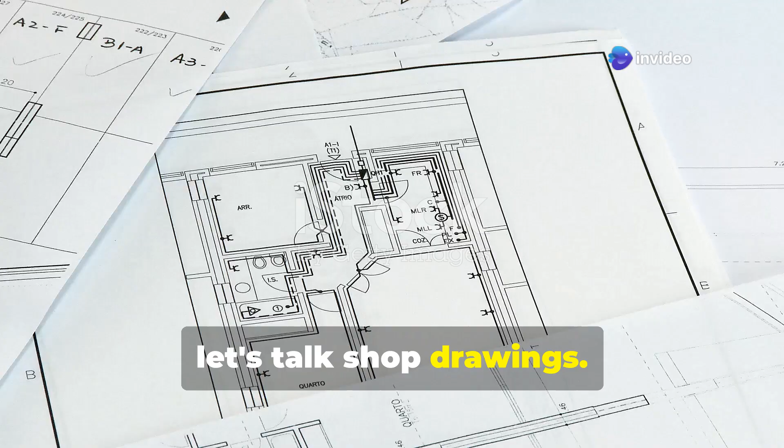All right, let's talk shop drawings. Shop drawings are detailed plans that show how various components of a building will be fabricated, assembled, and installed. Created by contractors or suppliers, these drawings are submitted for approval before construction begins. Let's break down the key points about shop drawings in construction.

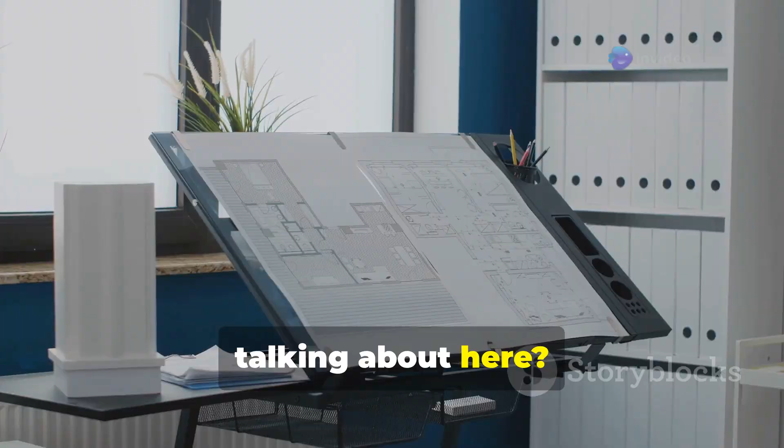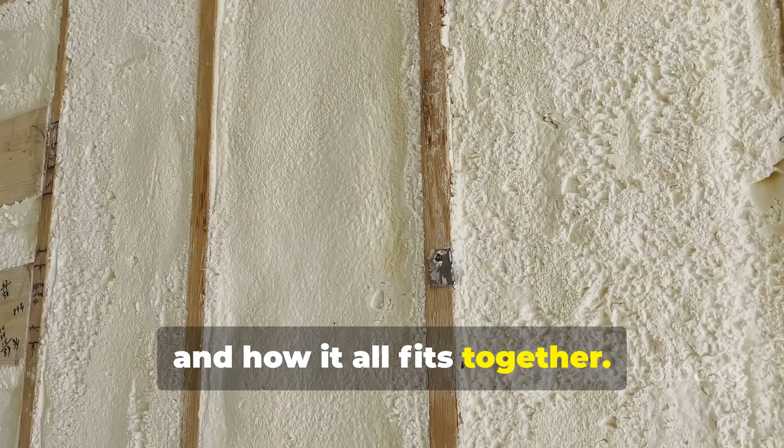So what kind of detailed information are we talking about here? Think of shop drawings as the instruction manuals for every single piece of your building. They tell you exactly what materials to use, how big each piece should be, and how it all fits together. We're talking about the exact dimensions of your windows and doors, the type of insulation, the layout of your electrical

wiring, and more. These drawings include dimensions, materials, manufacturing methods, and installation details. They ensure everyone is on the same page, from the architect to the contractor. It's all about getting the details right, because in construction, the devil is always in the details.

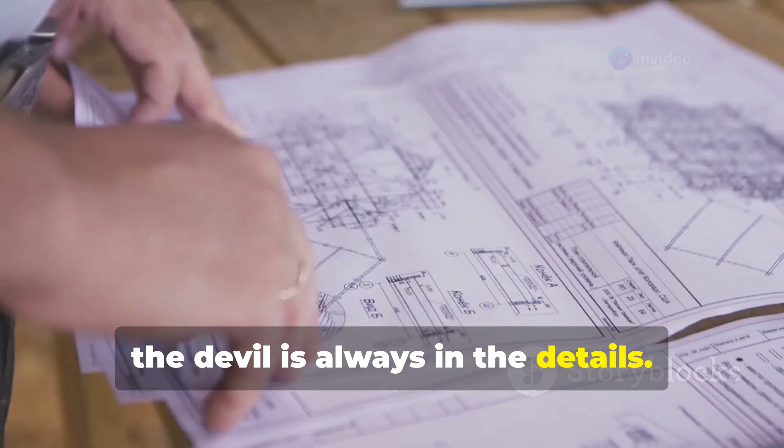Now let's talk about how these shop drawings play into the actual construction process. These drawings are the backbone of the entire operation, serving as a bridge between the design phase and the actual construction on site. Many components are custom-made, fabricated to specific measurements and specifications. This means that each piece is unique and tailored to fit perfectly within the overall structure.

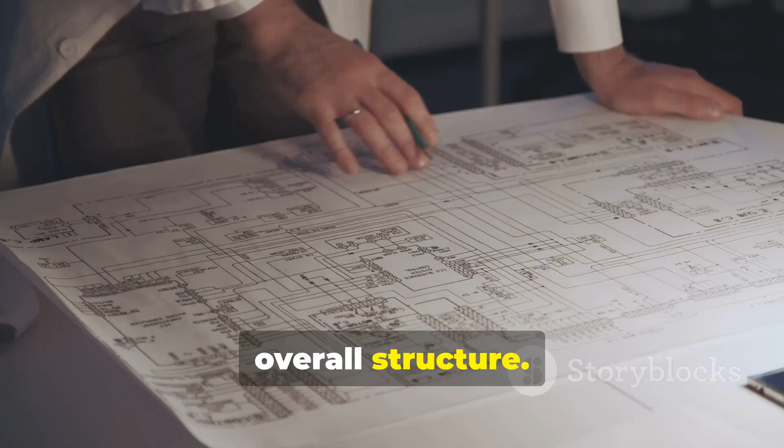Shop drawings guide the fabrication of these components, providing manufacturers with all the necessary information. These detailed drawings ensure that every element is crafted with precision, adhering to the highest standards of quality. This includes materials, dimensions, tolerances, and any special finishes. The level of detail in these drawings is crucial, as it leaves no room for error during the fabrication process.

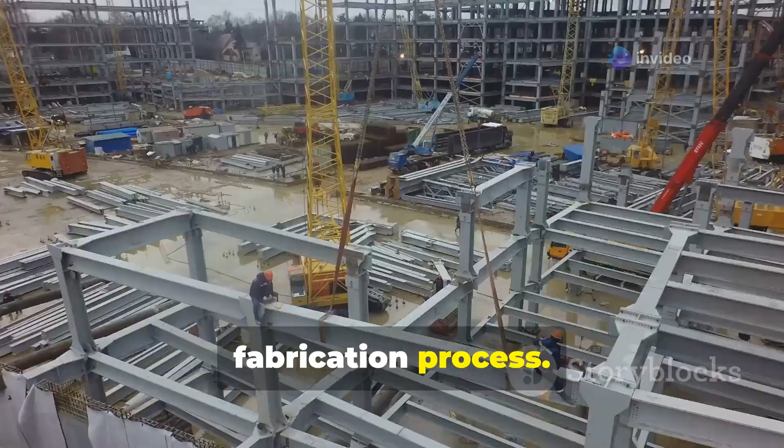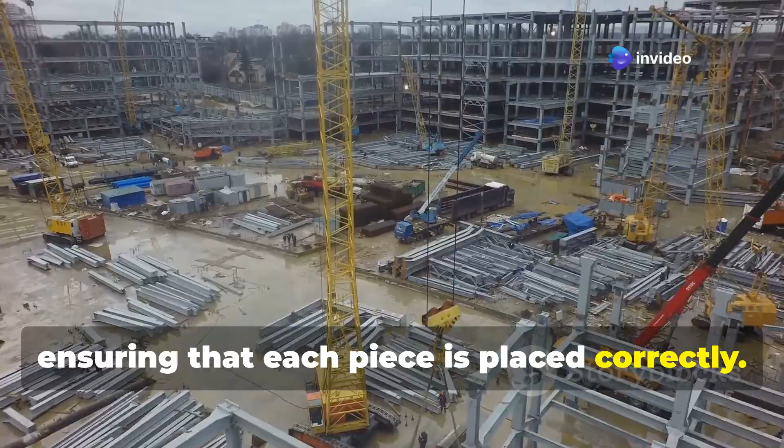But it's not just about fabrication. Shop drawings also show how these components are to be installed on site. They provide a clear roadmap for the installation team, ensuring that each piece is placed correctly. They include detailed diagrams and instructions on how the pieces fit together. This step-by-step guidance is essential for maintaining the integrity of the structure and ensuring that everything aligns perfectly.

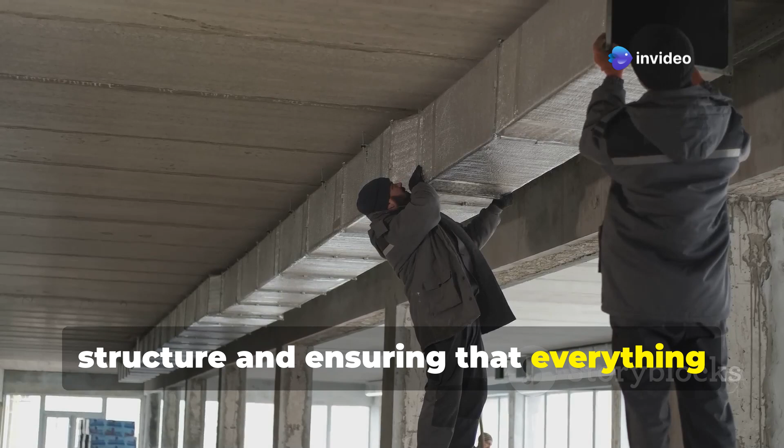This ensures everything goes together smoothly on site, preventing costly mistakes and reducing waste. A well-coordinated installation process can save both time and money, making the project more efficient. Remember, time is money on a construction site. Delays can be expensive, so having accurate shop drawings helps keep the project on track.

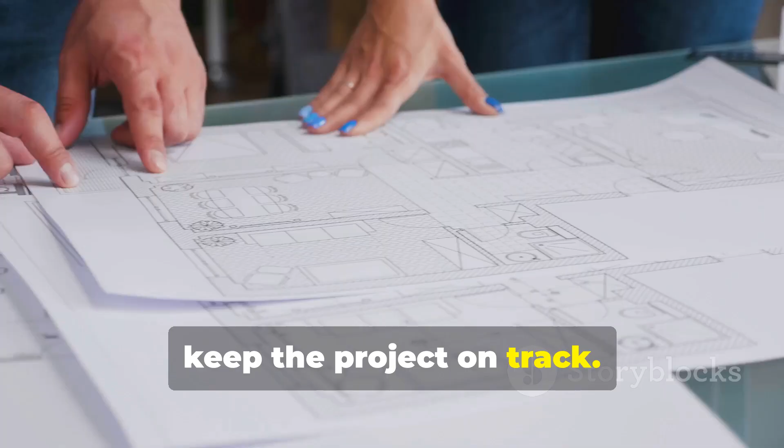Accurate and detailed shop drawings are essential for a successful project. They serve as a reference point for everyone involved, from the fabricators to the installers. They help keep the project on schedule and within budget. By providing a clear and detailed plan, shop drawings ensure that every phase of the construction process runs smoothly, ultimately leading to a successful and timely completion.

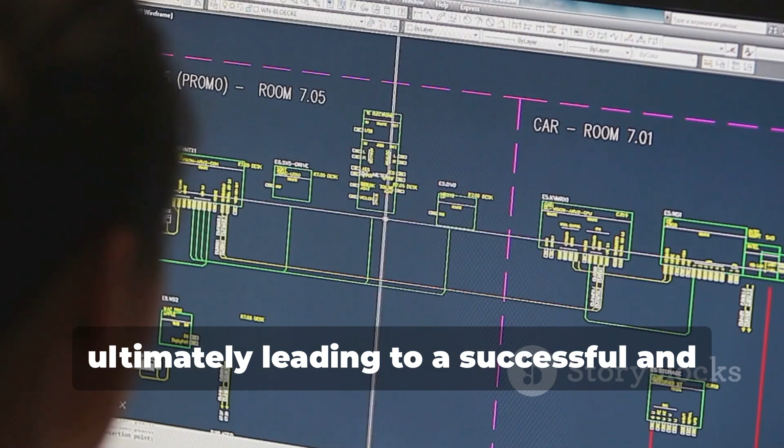Construction is a team sport, and communication and coordination are key. Shop drawings act as the communication hub for the entire project. They help avoid potential clashes and conflicts between different building systems. By overlaying different shop drawings, the design team can identify areas of interference.

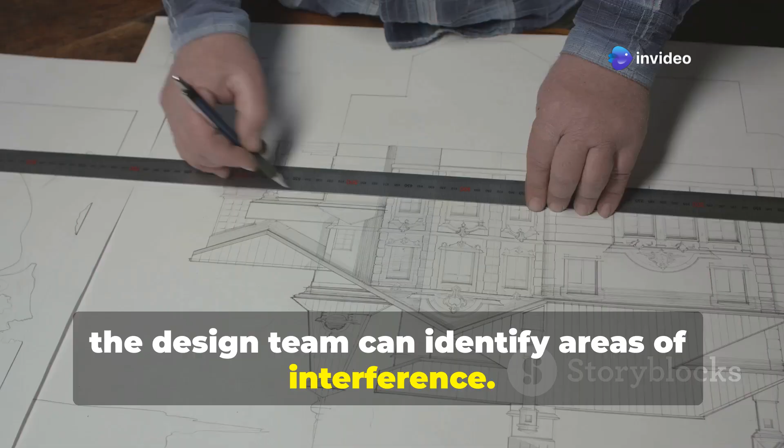This is especially important in complex building designs with tight spaces. Shop drawings allow the team to virtually assemble the building, identifying and resolving issues early on. This proactive problem-solving saves time, reduces costs, and ensures the project runs smoothly.

Now, let's talk about the approval process for shop drawings. This is a critical step in any construction project, ensuring that every detail is meticulously planned and executed. The contractor or subcontractor submits their shop drawings for review. These drawings are detailed plans that illustrate how various components of the project will be constructed.

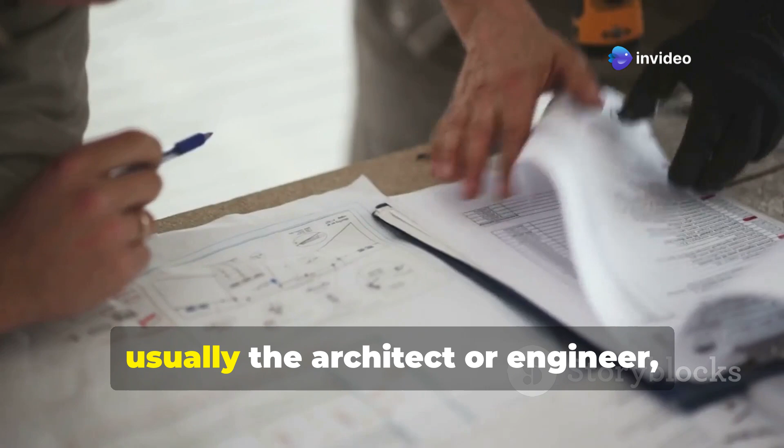The consultant, usually the architect or engineer, reviews these drawings to ensure accuracy and compliance with project requirements. This review process is essential to catch any discrepancies or errors early on. They check dimensions, materials, connections, and construction methods. Every aspect is scrutinized to ensure it aligns with the overall design and specifications of the project.

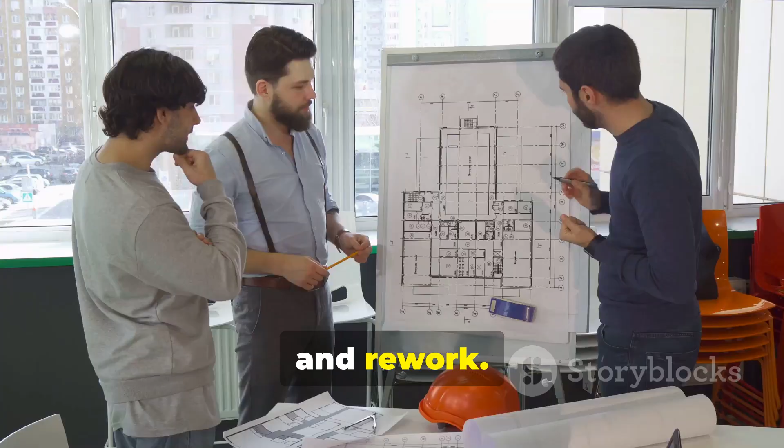This approval process protects everyone involved, ensuring the owner gets what they paid for and the contractor builds to the correct specifications. It also helps in avoiding costly mistakes and rework. It also ensures the architect's and engineer's design vision is realized. Their creative and technical input is vital for the project's success, and the approval process helps in maintaining the integrity

of their designs. Don't take the approval process lightly. It's a collaborative effort that requires attention to detail and clear communication among all parties involved. Make sure the shop drawings are reviewed thoroughly and signed off on before any work begins. This step is crucial to ensure that everyone is on the same page and that the project can proceed smoothly.

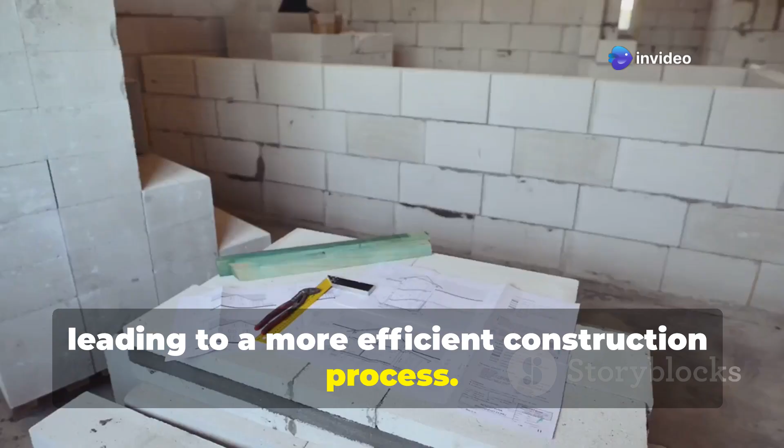This small step can save a lot of headaches down the road. Properly approved shop drawings can prevent misunderstandings and disputes, leading to a more efficient construction process. Accurate and approved shop drawings are crucial for a successful project. They serve as a roadmap guiding the construction team and ensuring that the final outcome meets the project's goals and standards.

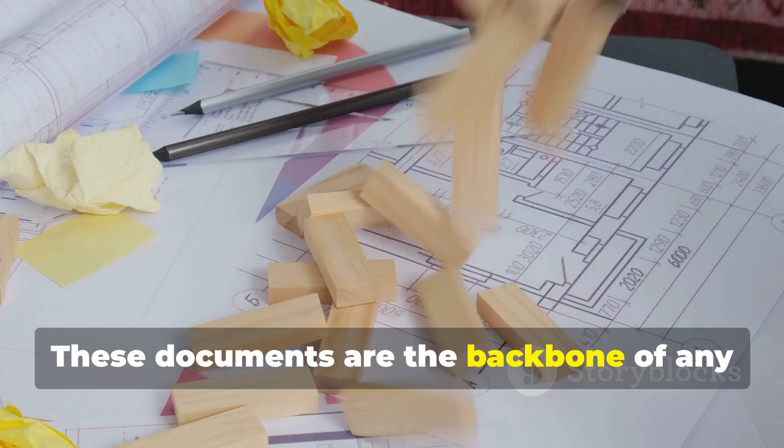Let's talk about the importance of accuracy and compliance in shop drawings. These documents are the backbone of any construction project, serving as the detailed instructions for how a building or structure should be constructed. Without precise and compliant shop drawings, the entire project can face significant risks and setbacks.

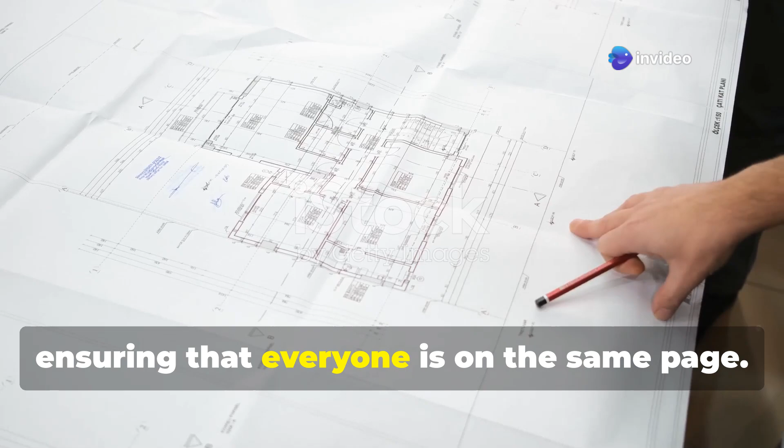These drawings are legally binding documents that dictate how your project will be built. They serve as a contract between the owner, the architect, and the contractor, ensuring that everyone is on the same page. Any discrepancies or errors in these drawings can lead to costly delays, legal disputes, and even safety hazards.

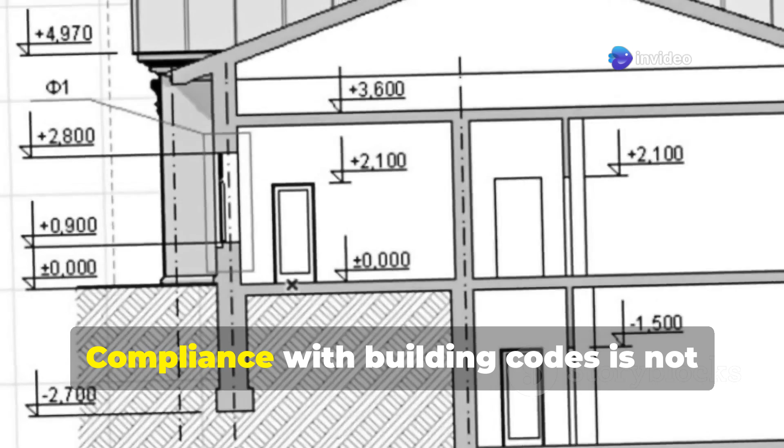They must be accurate, detailed, and comply with all applicable building codes and industry standards. This means that every line, every measurement, and every note must be meticulously checked and double-checked. Compliance with building codes is not just a legal requirement, it's a matter of safety and quality.

Safety and structural integrity start with accurate and compliant shop drawings. These drawings ensure that the building will stand the test of time and withstand various stresses and loads. They are the foundation upon which the safety of the entire structure rests.

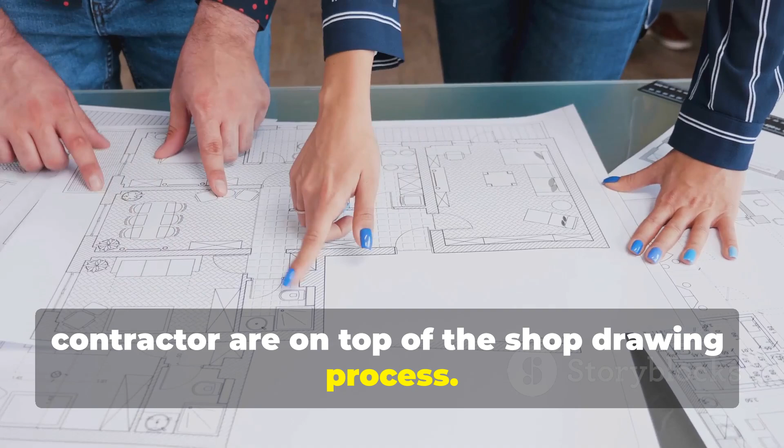Owners need to ensure their architect and contractor are on top of the shop drawing process. Regular reviews and updates are essential to catch any potential issues early on. This proactive approach can save time, money, and resources in the long run.

Contractors need to ensure their subcontractors submit accurate and compliant drawings. This means setting clear expectations and providing the necessary resources and support. A collaborative effort between all parties involved is crucial for the success of the project.

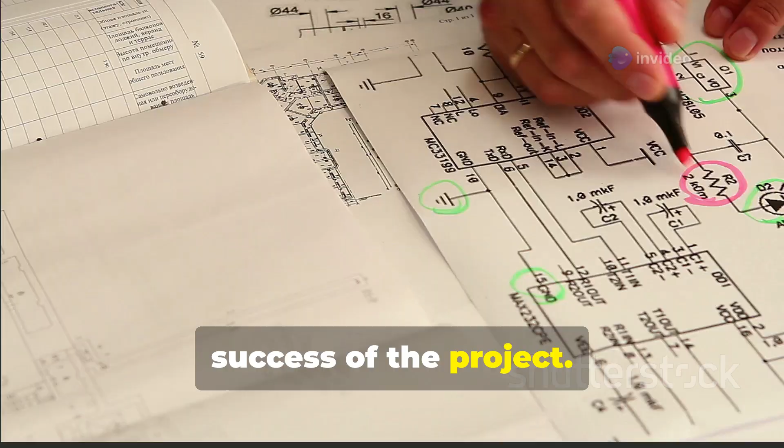Subcontractors need to understand the importance of getting the details right. Every small detail can have a significant impact on the overall project. Attention to detail and a commitment to accuracy are essential qualities for anyone involved in the creation of shop drawings.

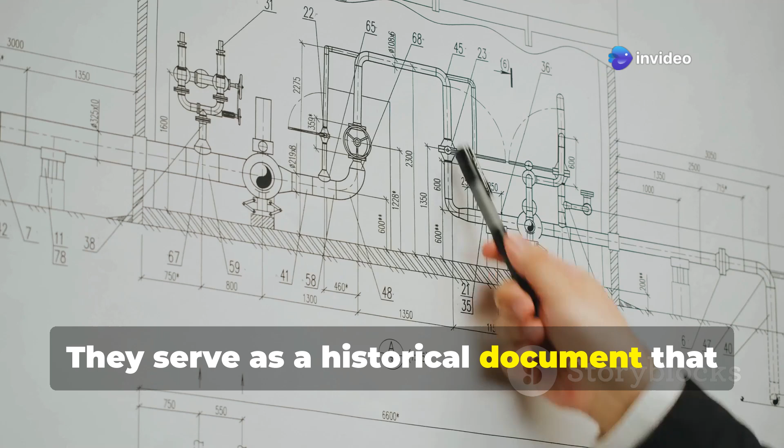Shop drawings are a record of what was agreed upon and what should be built. They serve as a historical document that can be referred to long after the project is completed. Keeping these records organized and accessible is important for future maintenance and renovations.

If something goes wrong, these drawings are the first thing people will look at. They provide a clear and detailed account of what was planned and what was executed. In the event of a dispute or investigation, accurate shop drawings can be a crucial piece of evidence.

Let's make sure they're something we can all be proud of. By prioritizing accuracy and compliance in shop drawings, we can ensure the success and safety of our construction projects. It's a collective effort that requires diligence, collaboration, and a commitment to excellence.

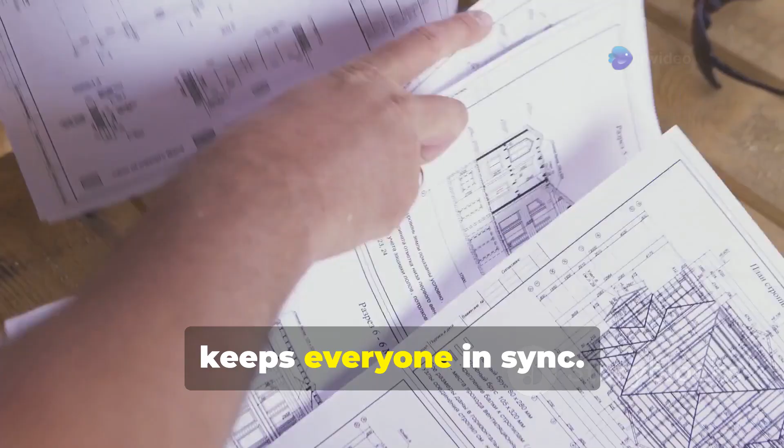Construction is a symphony of moving parts with different trades working together towards a common goal. Shop drawings act as the sheet music that keeps everyone in sync. Different subcontractors need to coordinate their work to ensure their systems integrate seamlessly. Shop drawings provide a common language and shared understanding of how all these pieces fit together.

By overlaying these drawings, potential clashes can be identified and adjusted. This collaborative approach helps prevent costly rework and schedule delays. Shop drawings are one of the most effective communication tools in the construction industry.

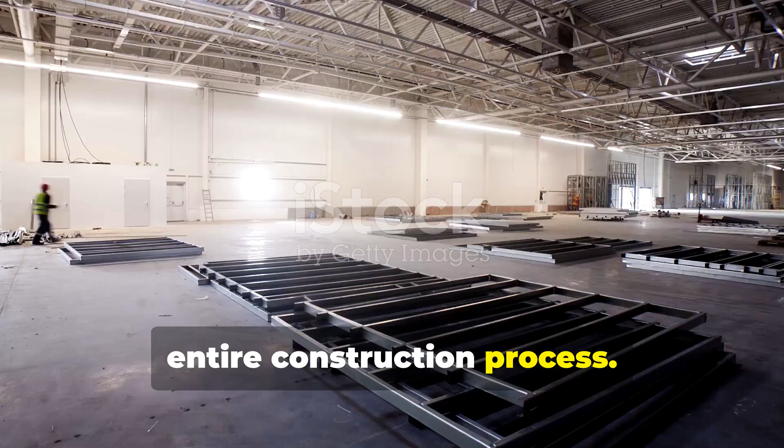Once shop drawings are approved, they become the guiding documents for the entire construction process. They're used for ordering materials, fabricating components, and installing those components on site. Approved shop drawings represent a shared understanding of what's going to be built and how. They maintain quality control on the project.

If there's ever a question about how something should be done, the approved shop drawings are the go-to reference. They help avoid disputes and provide documentation needed to resolve issues fairly. Approved shop drawings should be kept on site and referenced throughout the construction process. They're valuable documents that ensure the project is built right.

In the construction world, things don't always go according to plan. Unforeseen site conditions, client changes, and mistakes can happen. Even when things change, shop drawings remain important. They provide a baseline for managing changes effectively.

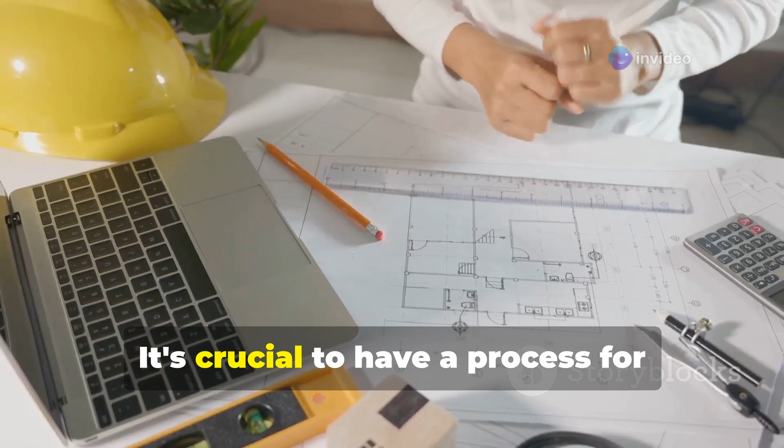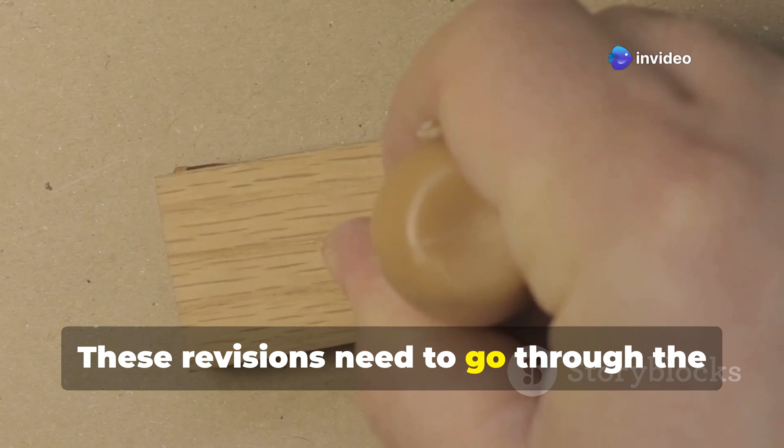It's crucial to have a process for revising and updating shop drawings as needed. Changes to the design, scope of work, or materials must be reflected in the shop drawings. These revisions need to go through the same approval process as the original drawings. This ensures everyone is aware of the changes and that the revised drawings are accurate and compliant.

Too much documentation is better than not enough. Shop drawings are a record of decisions and changes, ensuring the project is built right.

So there you have it. We've covered a lot of ground today, and I hope you all have a better understanding of what shop drawings are and their importance. That's a wrap on shop drawings. I hope this video helped you understand their role in construction.